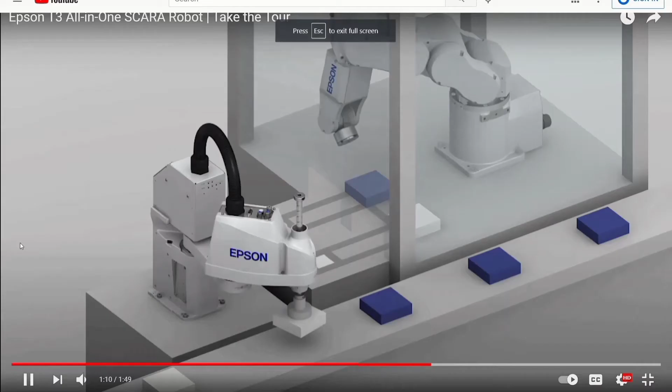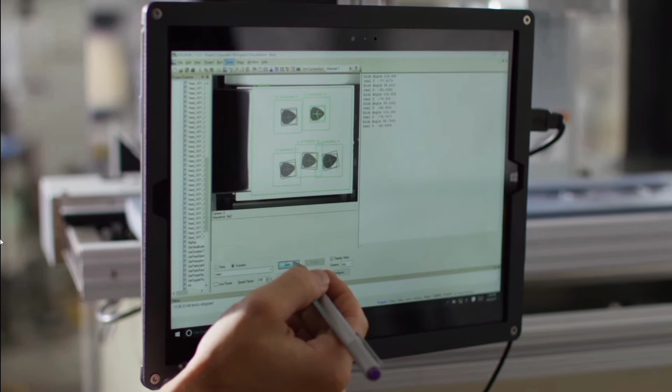While designed for simple applications, the T3 is packed with power, offering a 3-kilogram payload and a 400mm reach. Included with the T3 is Epson's user-friendly RC Plus programming environment, which has set the industry standard for ease of use. For simple applications and to replace existing slide-based systems, experience the difference with Epson's T3 all-in-one SCARA robot. Take a step towards the future of automation.

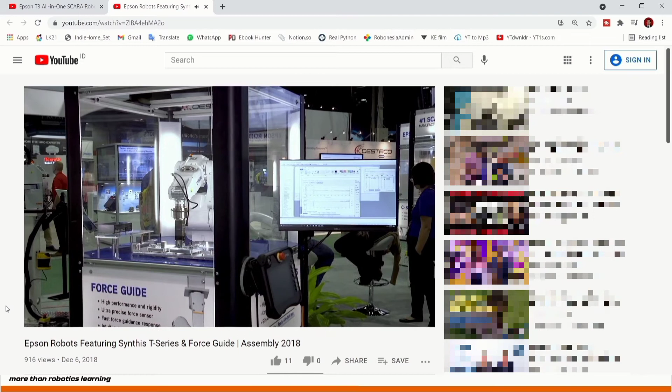Good afternoon. My name is Phil Barati. I'm the engineering manager with Epson Robots. At the assembly show today, we've got some great new products we're going to show you.

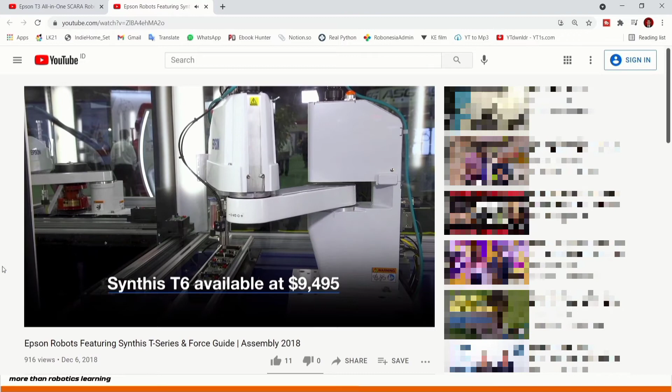Primarily, we're looking at the T6 SCARA robot. It's the big brother of the T3 robot. The T6 has a built-in controller. It runs on both 110 and 220 volts. It has I/O that is extended out to the arm, and it's internally powered.

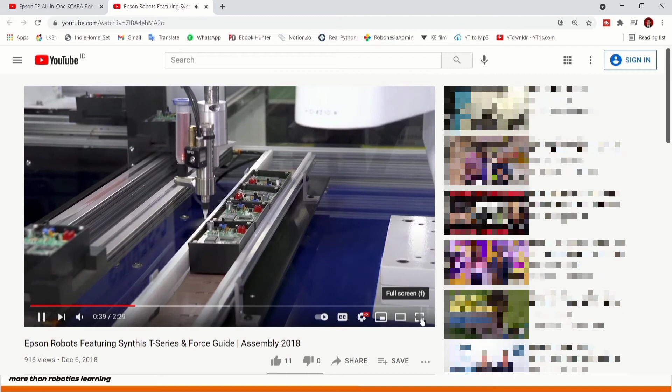This application is actually showing two components of Epson Robots. We're doing a dispensing, and we're using vision to identify the locations on the circuit board where we're supposed to do the dispense. And then after we do the dispensing, we're doing an inspection. Something that's unique about our inspection is that we're checking for the consistency of the bead after it's been placed down.

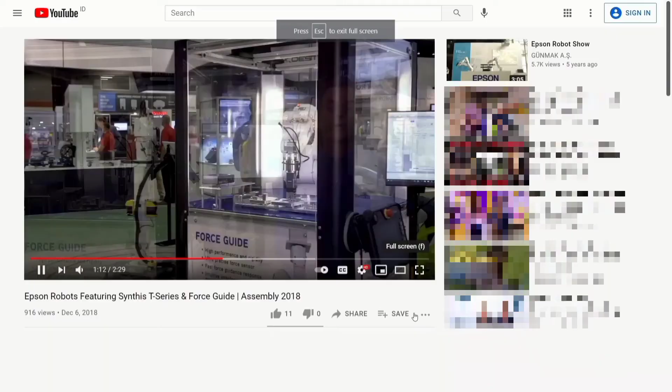One of our newest offerings shown at the assembly show this year is our Force Guide product. This is a very exciting product that we have. It's a fully integrated force sensor that goes directly into the servo loop for the robots. This allows us to compensate motion with force. We have a force monitor that's built into the system, so you can actually monitor force and position at the same time.

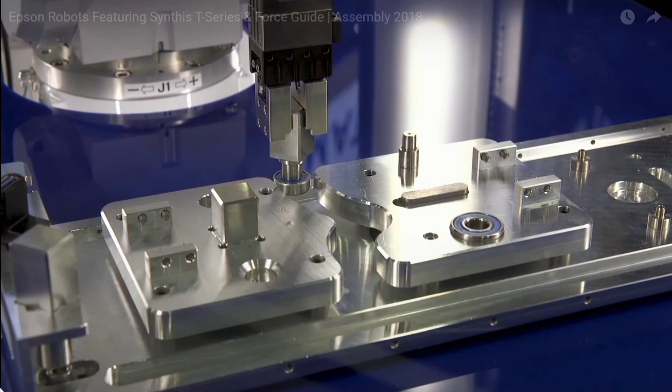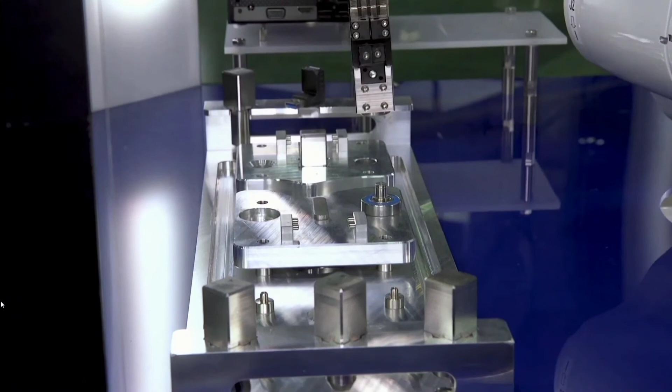You'll notice that the robot has the ability to find and follow when we're doing this application. You'll see how it has the ability to search for edges on the parts. It can search for depth on the holes. What makes the product really unique is that the configuration screen allows you to configure the force guidance as opposed to programming the force guidance.

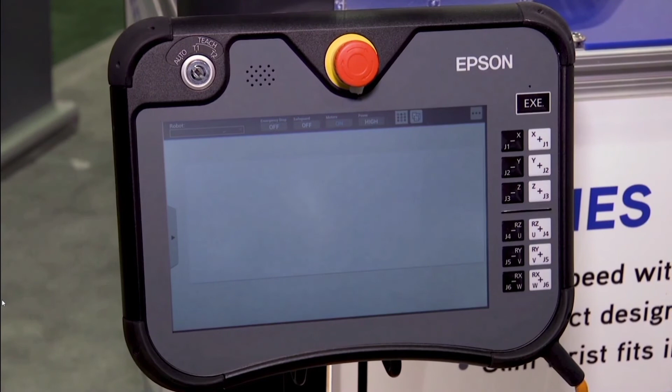Typically, you'll have to understand commands to make the force sensor tie into the robot motion, but what Epson's doing is we're actually configuring the tools in a graphical interface as opposed to programming the force sensor. And this is what really makes this the most powerful option for our robots.